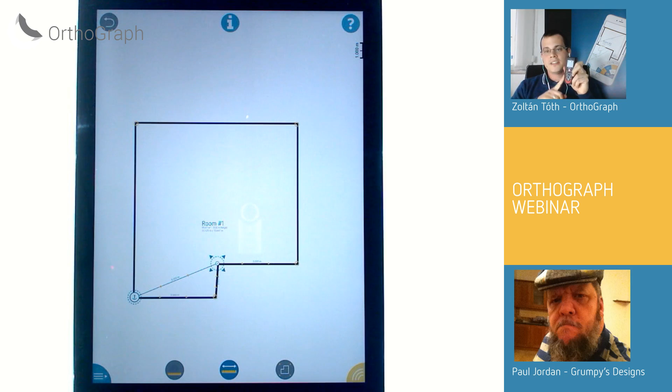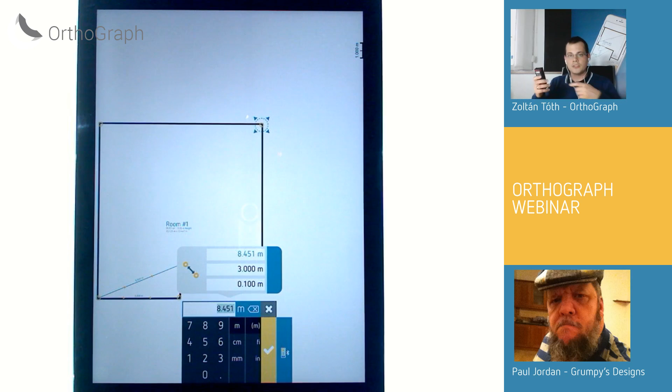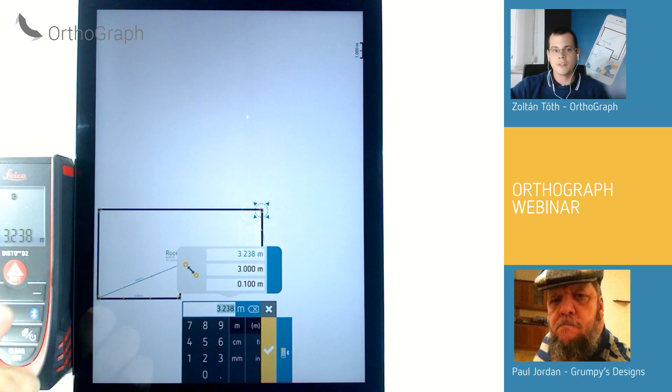The way you can measure into this drawing is that you can just use a laser distance meter like this, a Disto D2 device, and connect to it via Bluetooth, just like that. So let's connect to it, and I'm going to measure, let's say, this part over here. All I have to do is trigger the measurement panel, push the laser against the wall behind me, shine it to the other side of my room, push the button, and the number is there. You see the number I measured, 3.238, is on the screen.

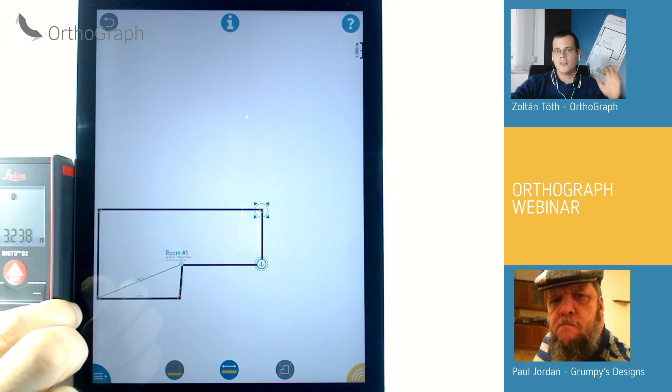Here's something new we did with the application a couple of weeks ago. We realized that when you are doing a diagonal measurement, you have to do a lot of things at the same time—fold this thing out, hold the laser at an angle, and keep an eye on the laser dot while pushing the button at the same time. We realized that when you push the button, sometimes you move the laser dot, and that might compromise your measurement.

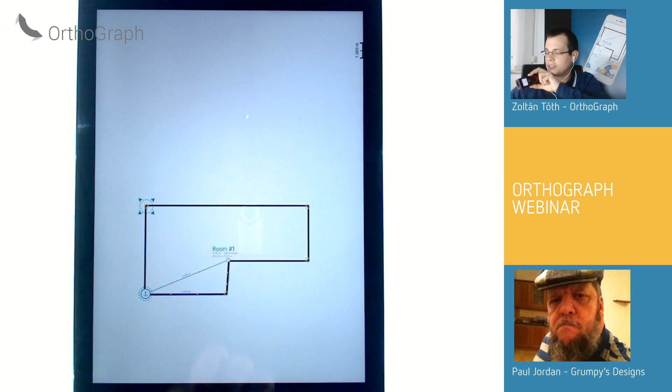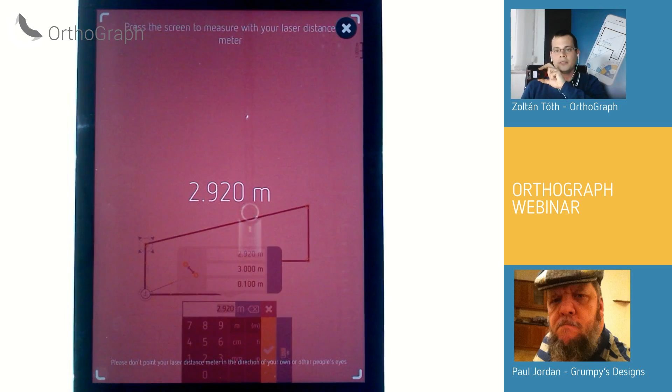So we decided that you would be able to trigger the measurement from the tablet screen. I'm going to hold it in my hand so you can see it better, so that I'm not touching the measurement button—you actually highlight the value you want to measure just like this. Instead of pushing the button on the device, you can just push this button there, and now the whole screen turns red. You just tap on the screen and the number gets to the system right away. All you have to do is keep your eye on the laser dot.

That's about it—that's how you can make your measurements much more accurate.

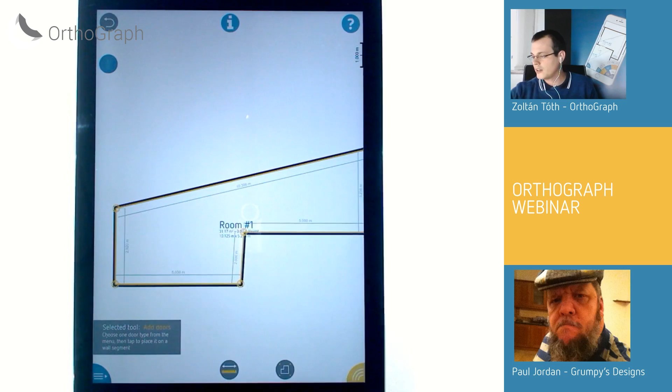One issue that comes up every now and then is how you enter locations and measure doorways. We've got that covered because we have doors and openings that you can measure. Let's start with a simple door here. You can not only position this door, but also modify the opening direction. You can measure where this door is, let's say 2 meters from the corner, and one measurement across would allow me to measure not only the width, but also the height and the threshold height of this door.

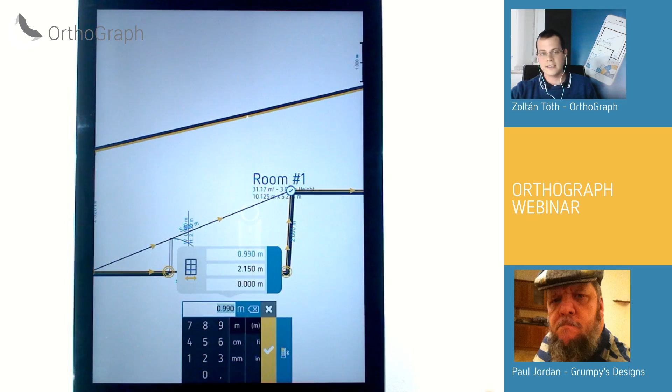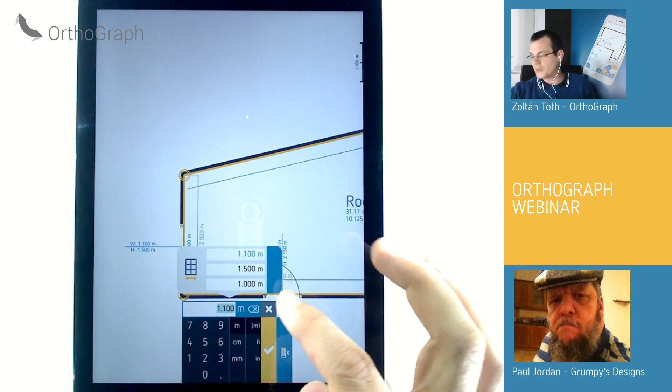For instance, if I place windows like this one, I can modify not only this measurement, but also the sill heights, which is very important if you're looking for 3D data. What you see at this point is that even though I only had a couple of measurements placed, everything exists as a 3D model.

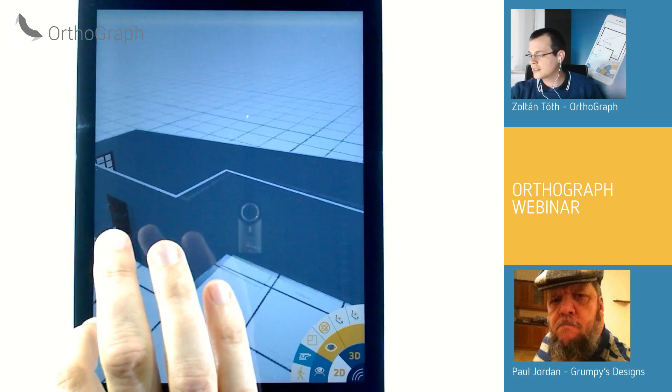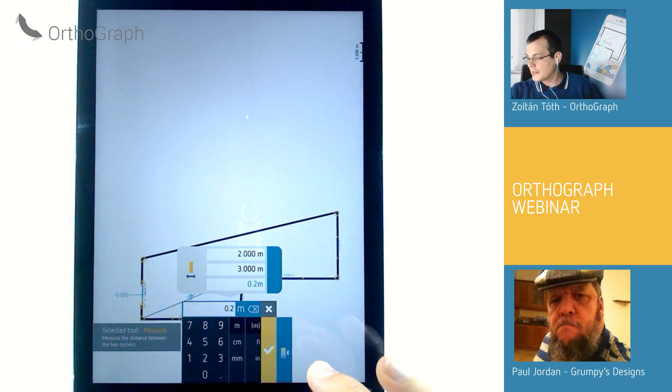Everything I did here has a direct consequence in our 3D model. It's not compulsory, but you can also measure the wall heights and thicknesses separately, just like that. So you can crank up the thickness all you want.

One thing that's relevant when doing a site survey is how you add another room. Measuring one room is fine, but how you get from one room to the next, how you make a full building documentation, there are many ways to do that.

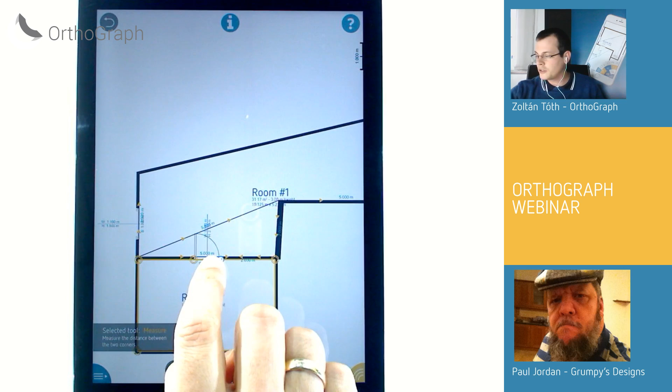One way to tackle this in OrthoGraph is to sketch your next location close to the first one. It attaches automatically, creates a new location, and then you can measure backwards from your doorway, which is your only reference point. So you start from the beginning, measure the rooms, measure the locations.

But this might not work all the time. Sometimes when doing measurements in irregular buildings where you don't know where the rooms align or where they meet, you have to measure the components separately and merge them as you go. Let me show you how that works.

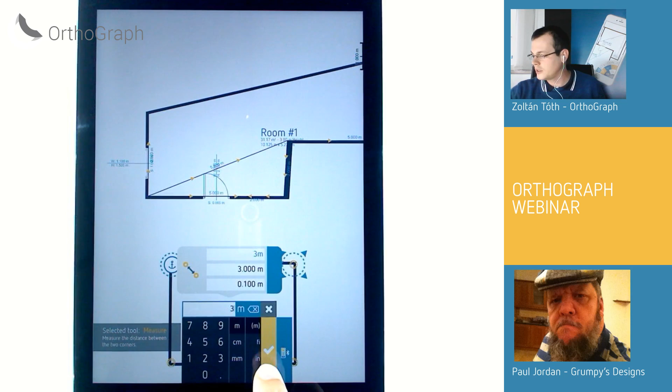Let me just undo this room and try the very same thing in a different location. Let's say there's another room here, and I measure this room for its dimensions. I know there's a door here, which is the same door.

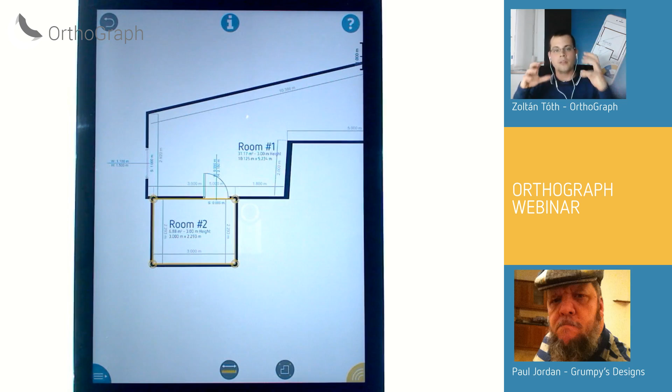So I can highlight this door, copy it into the next location, and measure it up — let's say this is 0.2 meters from the corner. Then all I have to do is snap the two locations together, and when I do, the two locations are now connected. This way you can discover tiny discrepancies and irregularities, or maybe wall thickness changes, in your drawing.

Now at this stage you can decide to add more elements, doors and windows to your drawing. One thing that might be relevant is how to add objects, furniture pieces, or structural elements to your drawing. We have an ever-growing library of different elements in our application.

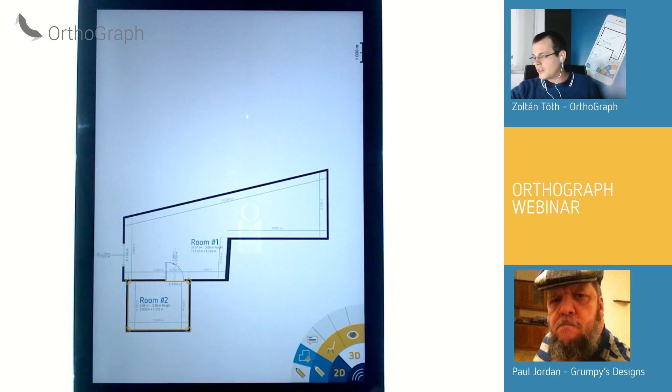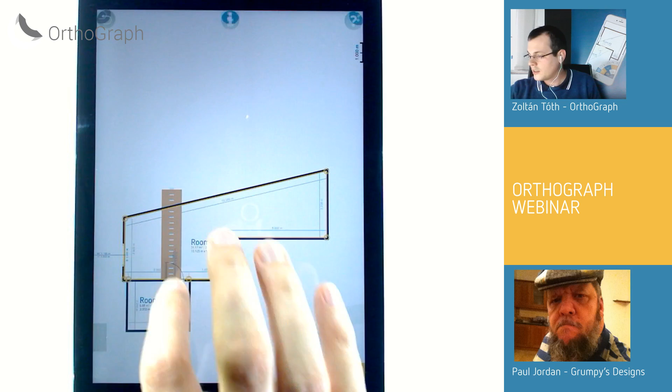One thing to keep an eye on is that we have structural pieces such as columns, pillars and staircases. The great thing about these elements is that you can not only insert them into your drawing — I just inserted this huge staircase — but you can also rotate it, re-measure it, and resize it. So if I want to decrease it to a more manageable size, I can.

We also have a couple of columns and fireplaces you can work with. Let's use this column here. Don't forget that you can copy them as many times as you want, and these will be featured on your drawing as blocks. So if you export this drawing into CAD, which we're going to do in this session, you'll see that these are going to be part of the drawing.

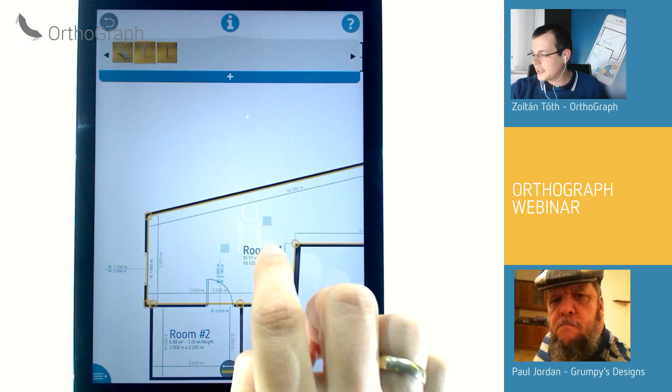Before you leave the scene, you can highlight the rooms themselves, which gives you access to room properties. These properties are great because you can not only manage the ceiling heights and wall heights, but also add properties in this field. The great thing about these properties is that they carry over to other rooms as well.

So if you know the things you want to record and measure on the scene, this would be the place to do that. For instance, you want to measure the occupancy, or you want to remark the fire safety classification or anything like that. Then you can just hit the text field, hit next, and name your property.

Let's say it's going to be occupancy. Then you can decide if you want this property for just this one room, or for all the rooms on your drawing.

Now you have an extra data field here in which you can take notes and add annotations. This data would be retrievable later, so when you go back to the office and want to consult the data you recorded, this would be the place to do that.

Also in this sheet, you can find the report on your drawing. This is a room by room estimation on the rooms' surface values, perimeters, and other important data you would need. You can capture this data into PDF and Excel format, but you can also review it on the scene while doing the survey.

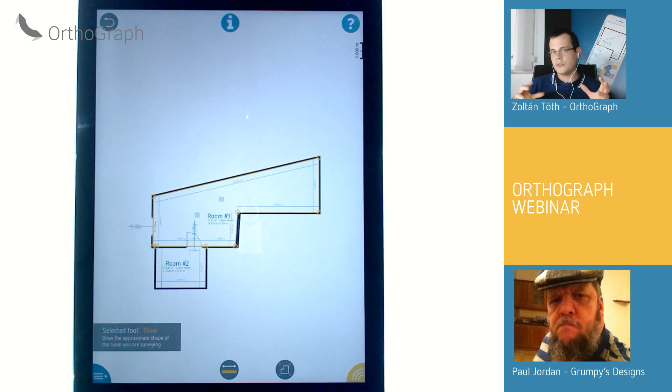Once you are done with a couple of rooms, you might want to know how to export this into something you can actually use, because sketching on a tablet is fine, but if you can't use this data on anything else, it makes no sense. That's why we have a couple of export formats, one of which I'm going to demonstrate here.

We have an image, which is just a screenshot of what I've done, a PDF which is a room book of the floor plan plus the estimations I showed you, an Excel sheet which holds only the estimations, and an IFC, a very important format holding all the building related data shown before. It gets you not only the building's dimensions and geometry, but also the properties. The last one is a DXF.

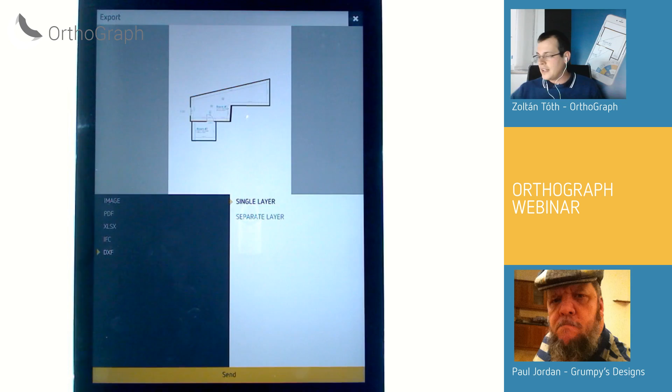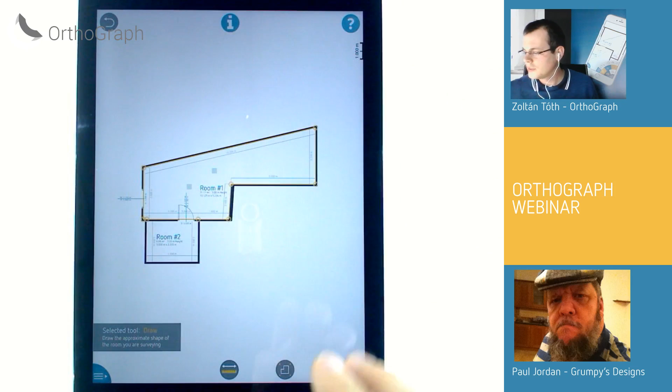This one I'm going to show you. I'm just going to send myself this DXF drawing and we are going to review how it looks like. Let me just email this to myself so I can open it whenever it arrives to my inbox and take a look at how it looks.

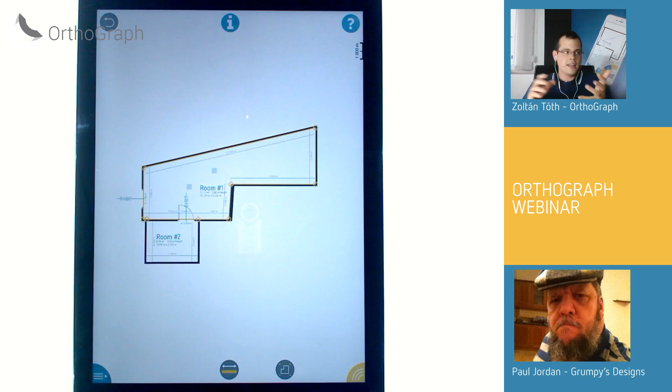Regarding the other export formats, users are always asking what kind of CAD software you can use to review the data you captured. We are always trying to check with many CAD applications out there. We know we support AutoCAD, Revit, ArchiCAD, Vectorworks, and other software as well, as long as they can import DXF or IFC, then it's manageable. If the applications can only import DWG, it usually works with that too.

Now I just have the drawing opened in my AutoCAD. Let me go to my drawing and see how it looks. So that's the thing we just sketched. Okay, here are the two rooms we did, and you can see the measurements we have done, and the two columns we placed.

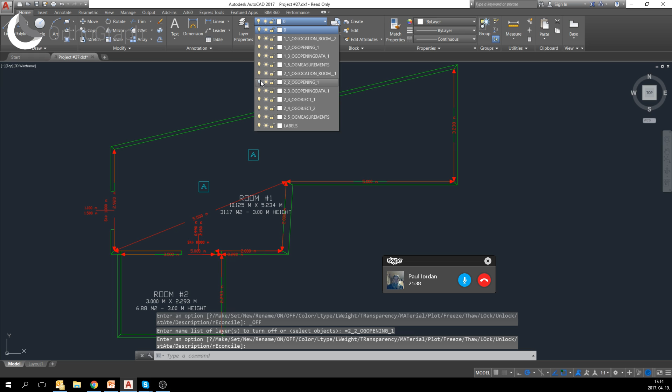Now the great thing about this drawing is that it is stored on separate layers. If I open up the layer manager, I can see and manage the layers. This is the way I would do it in AutoCAD. Obviously you would use your own layers and preset settings, so you can override this any way you want, but it's very important that everything is stored on separate layers.

Everything exists as blocks, so if you want to work with this wall piece, you would have to first explode it, and then you can work with that. Apart from that, your AutoCAD drawing is going to snap to these pieces. As you can see, OrthoGraph is aimed at gathering the building data, the most important data you want to work with. Everything which requires CAD skills is something you should do in CAD.

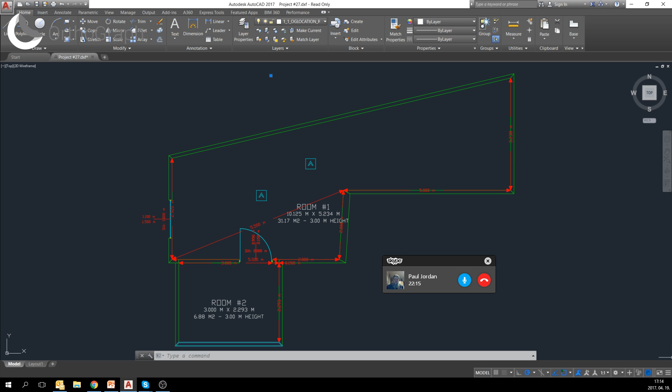Now, these are the basic things I wanted to show you regarding the application. I think the best course of action would be to give the word over to Paul, who is much more knowledgeable of AutoCAD and other things, and he's going to tell us more about his journey from pen and paper to AutoCAD. So, Paul, please take over.

Thank you, Toth. Very good presentation.

The presentation I'm going to do is called Making the Switch from Paper and Pen to Tablet and LDM, which is an abbreviation for laser distance measuring. In case you didn't get it, my name is Paul Jordan. I'm the owner of Grumpy's Designs, including me as the owner and the everything guy. And I'm an AutoCAD user, rapidly becoming a full-time OrthoGraph user.

Let's talk a little bit about who I am. I've got 20 years in the Air Force as an engineering technician, worked with all different types of engineering and architectural firms, 3 years working for an Autodesk reseller as both sales and tech support, certified application engineer in AutoCAD, AutoCAD MEP, AutoCAD Architecture, and Revit. I worked as a BIM coordinator on D1X, Fab 42, and Fab 24, which are all Intel processing facilities.

What am I up to now? I started Grumpy Designs about 3 years ago, mainly taking on whatever drafting work people needed done. Started seeing a trend for the need to have house plans drawn up for permitting. Armed with a tape measure, a 4-color pen, and an 8x10 graph paper tablet, I picked up work on a steady basis. The only advertising I've ever used is Craigslist.org under the services section.

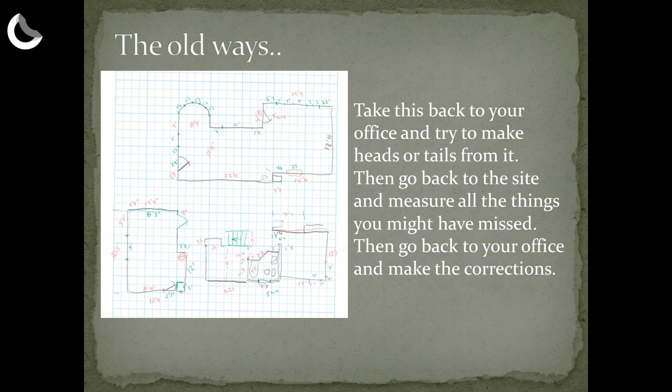That's the way we did it then, and I still find myself doing that on occasion on some really tricky buildings to do. Not enough hands.

I quickly saw the advantage of a laser distance measuring device and how much faster it was than using a tape measure. That was before I knew about OrthoGraph or anything else.

I'd carry a clipboard with a top that flipped up so I could store things inside it - extra pens, templates, candy bars. You gotta have your calories.

So carrying the tape measure, the tablet, and holding my pen to draw and write with - that makes three hands. I knew there had to be a better way. My LDM has Bluetooth. Lots of things have Bluetooth. Why can't my LDM talk to my tablet?

There's nobody out there that I found in the initial stages that was even looking at that. They have all these big lasers that do the clouds and all that, but I'm not looking at doing cloud surveys of buildings. The problem was my tablet was a generation earlier than the LDM I was using.

My LDM was a Leica D330i - yes, that's an older device. That's right, it's an older device. It's one of my backup devices now just for taking measurements.

It took a lot of research to find out that the Bluetooth software on the Leica wouldn't talk to my tablet's Bluetooth software.

So solution number one: I went to the Leica dealer, checked all the LDMs, got the Leica Disto E7100i, and made the connection I was after. Currently I'm testing - I also got another tablet with a newer version of the Bluetooth so they could talk to each other.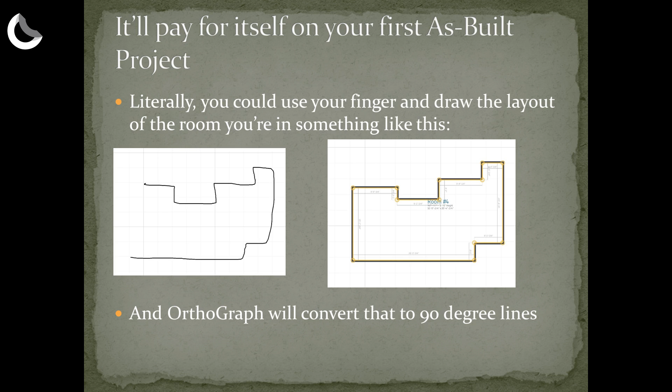My next step is you take your finger and select the measure command. It looks like a ruler, go figure. Pick one corner, then the next corner. Put your LDM in the first corner, aim it at the second corner, then push the measure button, either on your LDM or now it's on the tablet.

It's bigger, a lot easier to hit on that tablet. I don't know how many times I've hit that little button up there and find out I'm hitting the wrong button, even on my small thing with only 3 buttons. I'll hit the wrong button 2 out of 3 times. So the one on the tablet, that's my left hand, where my right hand can concentrate on holding the shot and holding the LDM still, making sure I get the shot.

Push the measure button and OrthoGraph will adjust the whole room to that dimension, and it puts a dimension on the wall. You don't have to tell it, I want to dimension this wall, it puts it on there. Continue doing that around a room and end up shooting back to the first corner. Before you know it, you have a room drawn to scale, haven't dropped your pen, haven't drawn your dimensions in the wrong color, and had time to eat a candy bar.

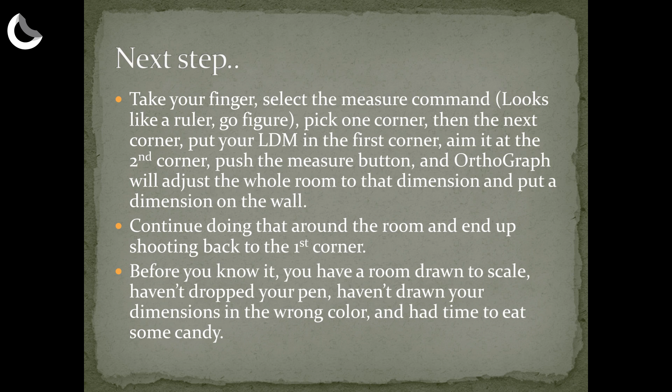Gotta do that sometime. Years and years ago I was a volunteer fireman, and when we were searching for victims in the house, we put our hand on the right wall and followed that hand all the way around, and eventually you get back to the same door you came in, checking the whole room you're in.

So if you take that way of doing things, drawing from one wall to the next, which is the way OrthoGraph is set up, it makes sure that you get everything done.

And when you hit save and send it off to yourself, and you get back to the office, or you could send it back to the office and let them look at it, they can make changes to it and start working on it before you even get home. If you have an office, you could send it to somebody.

So, let's see where we're at.

Last but certainly not least, I might have forgot to mention, all your walls are drawn in 3D. Tóth mentioned that in his presentation, he took a lot of the wind out of my sails on some of his parts, but it's all good to hear. All your walls are drawn in 3D with the height you set in the settings, which I'll show in a minute.

You can place windows, doors, furniture, stairs, etc. in the model as well.

OrthoGraph exports image files, PDF files, XLSX files. I believe that's Excel, that is actually the file format itself. The software that can open it is Excel, but that's XLSX, basically an Excel spreadsheet. All the numbers would be crammed into one spreadsheet with different tabs, so you can navigate between the different tabs and see the numbers and estimations you did.

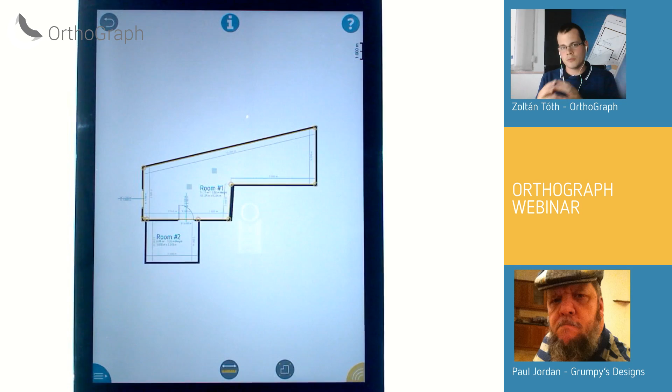Sorry to interject again. One thing I want to point out, and it's very good that you mentioned the help section, is something I want to show you in the app itself. We do have a help section on our website, and we also have a dedicated YouTube channel to store all the videos which show you the features one by one. But also, one thing we just developed is an integrated knowledge base into our app.

So what it does is you can just open up, I'm going to show you again, this question mark, and you can research things you don't understand regarding the application. This search bar is looking for keywords. So if you just type in things you don't know, let's say you want to know more about measurement, then you can look for the things in our knowledge base.

That's something that needs an internet connection to work, but regardless, if you do have internet connection, you can just find the relevant articles in this application. Now, if you do not find what you're looking for, you can just tap on this envelope up here, and then you would send a bug report to us with the file you're working on attached, and then we can take a look and see what's going on with your drawing. So that's one thing we integrated into our app.

Sorry for interrupting. We can continue now.

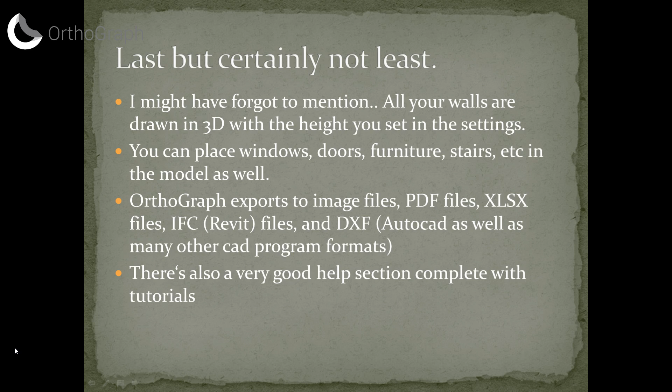Another neat thing, for those of you taking notes, recall I mentioned something about creating it in 3D. Tóth also mentioned and demonstrated it. Here's just a screenshot of the settings menu, and here's the 3D model next to it, what it would look like when you pull it on your screen. Down in the bottom corner is the main toolbar that you have. You click on those, and different menus come up and allow you to do different things.

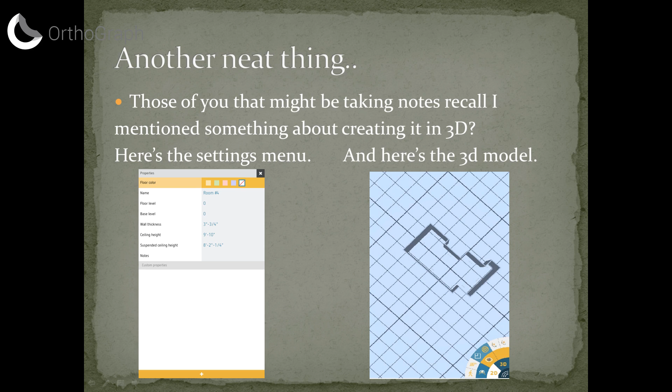In closing, in all my research to find a program like this, I can honestly say there are only one or two companies that would reply to emails. Several companies only offered iPad versions of their product. Others use the cameras on your phone for shooting distances.

OrthoGraph makes it for Android and iPad operating systems, and also it runs on smartphones as well. If you are the masochistic type who wants to run the application on a smaller screen, you can do that. It's something we do support, but for the sake of accuracy and faster work, we recommend a tablet. But we do work on Android and iOS tablets and smartphones as well.

A team from OrthoGraph has been talking with me anytime I have a question. Since they're in Hungary, that means I'm up at midnight to talk to them. It's okay, I'm insomniac, so that works out. It's a good match then. It's a shame we are a couple of hours ahead.

We are at GMT+1, so that sometimes makes it difficult to find the time, for instance, for this webinar. We decided to do a time manageable for most of our customers, but that's something we can resolve. We're going to resolve that? Are you moving here, or am I moving there? We are going to ask you to do the demos instead of us. Sorry.

They've been very open to ideas I suggested and have openly shared the direction they're going in the market. And before you asked, I already mentioned, yes, there is an iPad version as well.

One thing the attendees might not see from this is that you are part of the user base we utilize for beta testing and also checking our CAD output. That's something we do with some of our customers who are willing to invest their time to test the application, and in return we listen to their feedback, and also give them the latest development builds we have. So that's something we do with our beta testers.

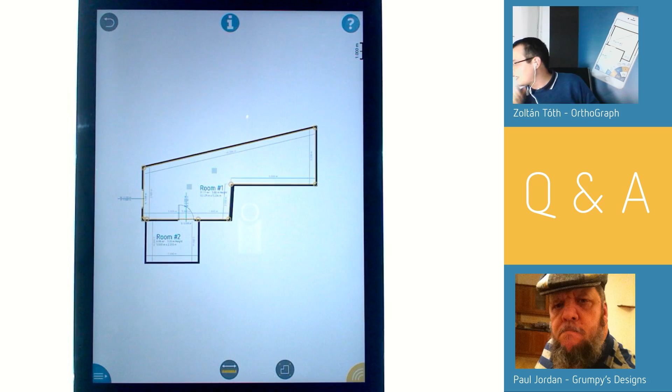Well, actually a lot of things came in regarding questions. Let me go back to our previous section regarding user questions. There's something I just want to read real quick: how it runs on a smartphone. That's something I can demonstrate on my own smartphone, just let me turn this thing on.

Meanwhile, while it's loading, let me look at the other thing that's being added. Somebody has two main questions: if we have any issues with crashing or loss of data, and how easy it is to deal with multi-story buildings. Let me start from the end of this question.

Multi-story buildings, this comes up every now and then, and here's how we tackle this situation. We suggest customers sketch things separately next to each other. You can sketch things on top of each other and pile up your buildings, but then it would be very hard to navigate through your drawing. So what I suggest is to start with one drawing here and do the next floor next to it, and then it would be very easy to bring this together in CAD. If you want to make sure you can navigate between the different floors, you can even open up a new project for your new floor.

So you can just name it, open up a new project, and that way you can make sure that you can find the relevant building parts. At the moment, we are not able to copy whole floors, but that's something we are going to figure out eventually.

Another question regarding this same attendee is what happens with data loss. Now, everything is saved the way I see it now. So if whatever happens with the app, if I run out of battery life or I manage to crash it somehow, then the very last thing I did would be retrievable here. So you don't have to manually save your work, because that's just time consuming and that's something you don't want to do. It always goes back to the last thing you did.

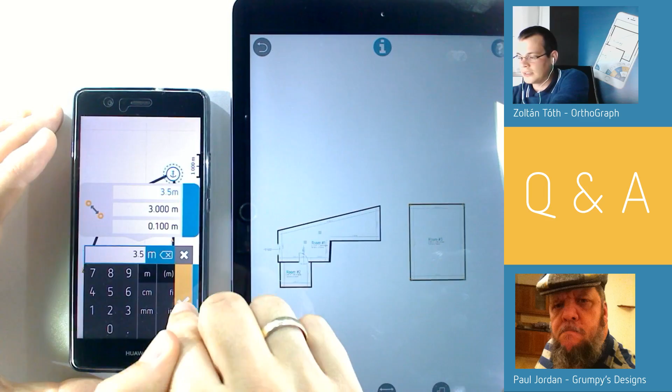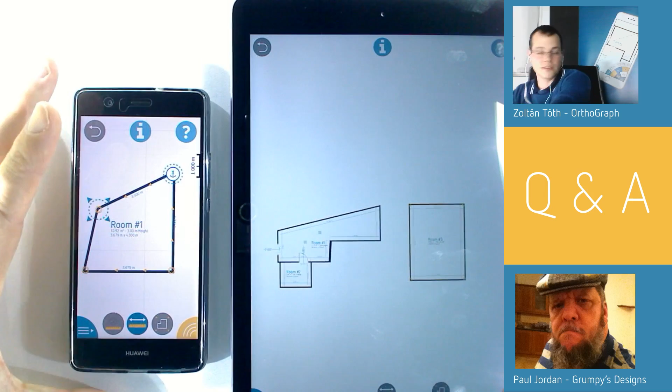Here you go. So that's my personal phone, and it's running on this screen now. The reason why it might be more difficult to work on a smartphone is because obviously the screen is smaller, so the menu takes up a lot of space. But if worse comes to worse, you can still work on it. The processing power of this phone is not going to prevent you from doing actual work. It's just personal preference, which one you prefer better, smaller screen or a bigger one. But the Bluetooth and other facilities are all supported, so it's all the same application. That's something I haven't shown you before.